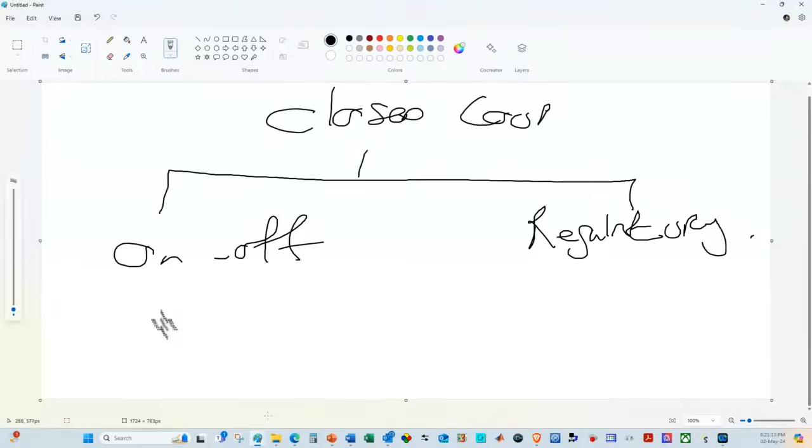I've got a tank, and my electrical colleagues put these little floater balls into the tank itself, and I'm going to have a pump at the bottom. What's going to happen is when I get to the high level over there, my pump is going to start to run. And when I get to the low level, my pump is going to stop running. So I can run it, and I can stop it.

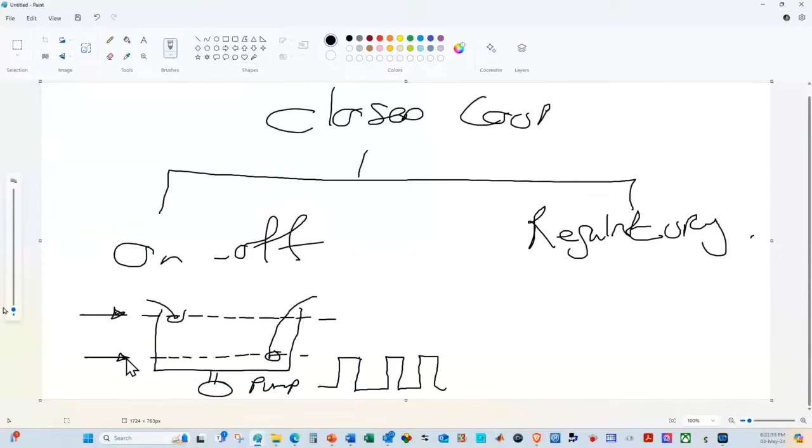My level is actually changing between that point, which might be at 90%, and that point, which might be down at 20%. My level is going to go from 90% to 20%, back to 90%. In other words, as the level gets high, I'm going to start the pump, and the level is going to drop down until I get to that 20%. Then the pump's going to stop and the level is going to start to rise up.

And then when I run the pump, the level is going to drop down, then rise up, then drop down again. These are two digital signals that I'm going to feed into my PLC. Kabu, does that explain it? So my PLC can work with on-off signals.

Now just to get back to my slides, does that not tie in with that form of control on the left-hand side? My level is going to vary between 90% and 20%. It's not a bad form of control, but it's going to give me quite a large variation.

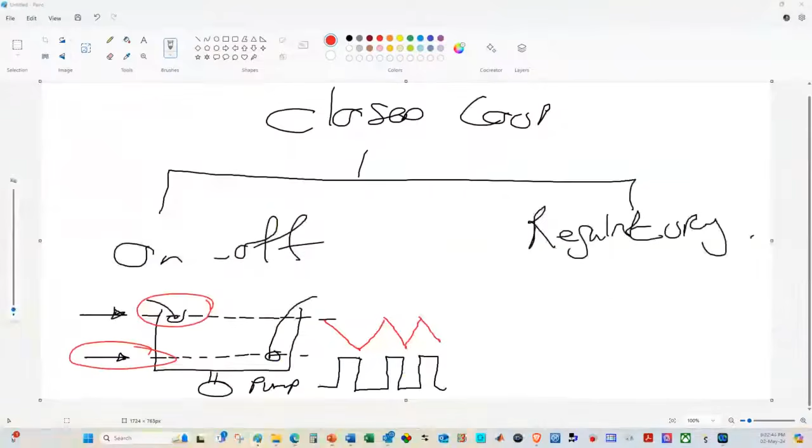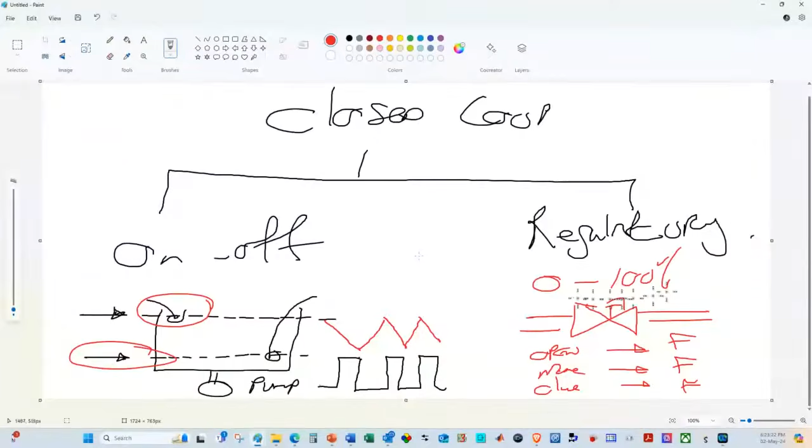Now if that's not good enough for you, then maybe you're going to go and have a look at the regulatory control. Regulatory control is when I control an output anywhere between 0 and 100%. Maybe I've got a control valve on my line, and that valve is going to be opened or closed. If I open it up a fraction, my flow is going to increase. If I open it up some more, my flow is going to increase a lot more. If I start to close it, my flow is going to start to decrease. That becomes the regulatory control. I can take it anywhere between 0 and 100%. And this starts to tie in with something I'll be speaking about very shortly.

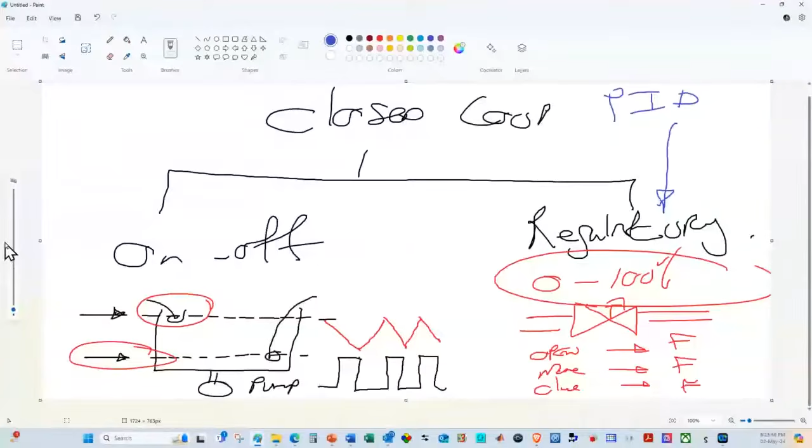And that is that we are going to put a controller in, and that controller is going to be known as a PID controller: proportional, integral, and derivative. That's the way we're going to start to control our process. God knows, I have not forgotten about your question. I'm working towards it. Let's go and get a brand new page.

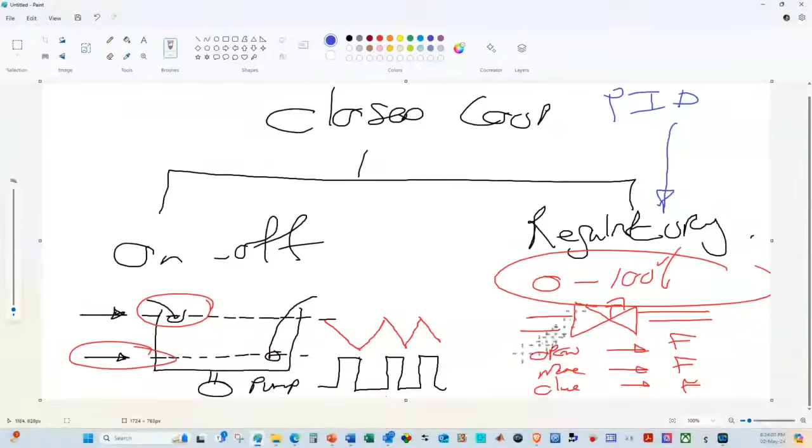Folks, I hate death by PowerPoint. I hate to put up slides where you have to read the slides and look at this and look at that. This is the way I present. I prefer to be very active, drawing my own pictures, if you don't mind. Right, let's get back to a brand new picture.

So what happens with my process, and why do we start to have a look at if there are going to be any losses? My process is sitting right over there; that's going to be my plant. Maybe I am controlling a level, a temperature, a pressure, or a flow. That is my process. I'm going to have some instrument put in place, and that instrument is going to measure my signal for me. Now that instrument will send an electrical signal, known as my process variable, and that could be something such as a 4 to 20 milliamp signal.

And this is going to come to my controller. I'm going to put in an arrow over there. Now have a look at what I'm going to do. My controller is going to, in this case, be negative feedback, a closed loop control. My controller is going to have a target value known as the set point, and it will compare the process variable to the set point. If there's a difference, it's going to calculate it as the error.

The error is the process variable minus the set point for a direct acting controller, or the error is set point minus the process variable for the other control that we are going to have. So it's going to come in that respect.

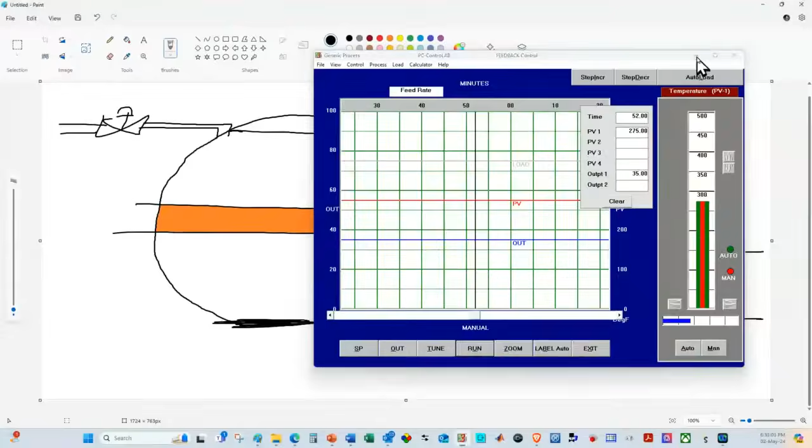Okay, thank you very much for those questions. I'm just going to keep this out of the way. I want to get back to that very, very shortly.

Now, when I start to look at a controller like this, then I'm starting to get automatic control, and then I can start to do this type of control where I am a lot closer to set point with my regulatory control, or I might put in advanced control, and then I'm going to be a lot closer to the set point.

I put in a set point of 75%, and it goes up to 76 and down to 74. I'm going to have very, very tight control. That's going to be a more important type of control. So yes, that's what it's going to boil down to.

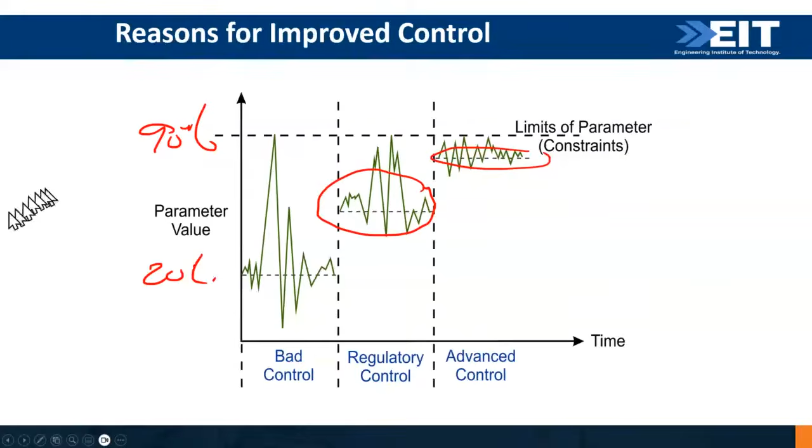The question from Timbu says, is SCADA an automatic or a manual control? Let me put that into perspective, and then we can take it from there.

When we talk about a SCADA system, my operators sit in a control room in front of a computer screen. That computer screen is often known as an operator workstation, or it's known as a human machine interface. That is the eyes and ears of my operator into the plant.

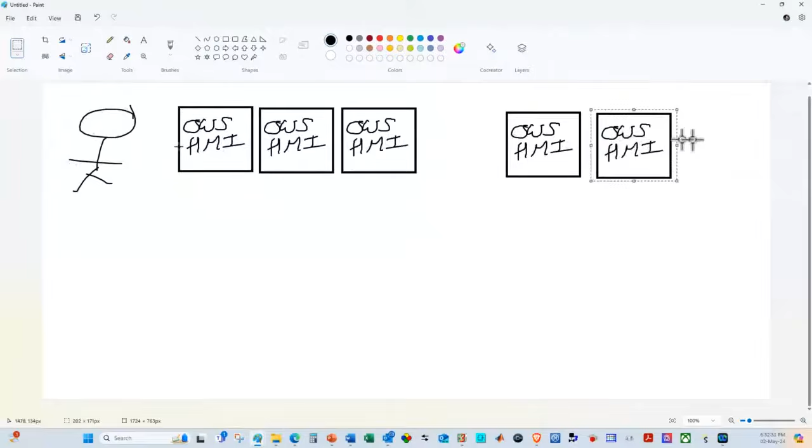Now the operators will have numerous screens. There's a second one in the control room, and a third one in the control room. All of these computers are linked to each other by means of a network cable, and that network cable is then connected to a very important computer system known as my master station, which could be one of the other computers, but I'm going to put this down as my master station. That computer, the master station, is in turn connected up to a network.

That network goes to my PLCs out in the field. My RTUs is the fancy word. There can be a PLC, and there can be a PLC, programmable logic controller, and there can be another PLC, programmable logic controller.

Now, this is actually known as my SCADA system. The total system is known as a SCADA system, or a distributed control system, DCS. The difference between DCS and SCADA actually lies here, because in the case of SCADA, I can send the information over long distances: 1 kilometer, 10 kilometers, 100 kilometers, 1,000 kilometers, 10,000 kilometers.

Absolutely correct, SCADA stands for Supervisory Control and Data Acquisition. Now, to get to your question, Chimbu, the operator sitting here can, for example, have a level control sitting on that PLC. If the operator puts that control into manual, then they have to change the input, the output, from 0 to 100%. Then it's manual control.

Right, I'm going to get back to my slides. We've now spoken about the different types of control that we can have. This is my plant. Anything that affects my plant is going to be a disturbance.

How about if you and I are going to try and control the level inside the tank, but I have pipes coming in which I'm not monitoring, and they can cause the tank to overflow? Any disturbance that is not measured is what we refer to as a disturbance that we have to work with.

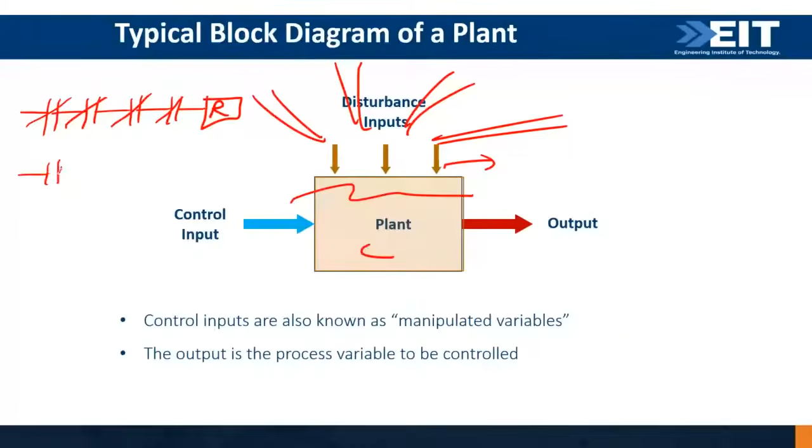Samuel asks, what are interlocks in control? If I was to have a start-stop process, if my system has no vibrations, and if it is not over in temperature, and if this switch happens to be in the right position, and if I do happen to have the right air coming in, I'm going to bring in my interlock relay. Once the interlock relay is okay, then I can operate the rest of my circuit. So an interlock is just going to lock out certain sections of my plant for me.

Remember that we spoke about PID control, and I said to you that the controller is going to have a look at the error.

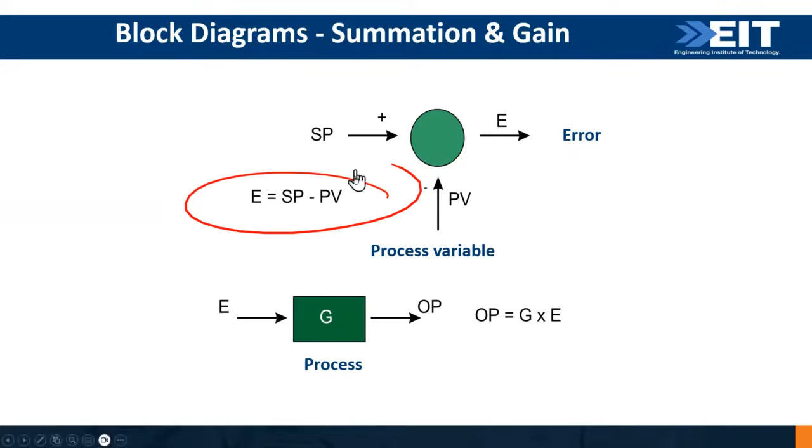The error is the difference between the set point and the process variable, and that's what it's going to use to control my process. I can have different types of processes.

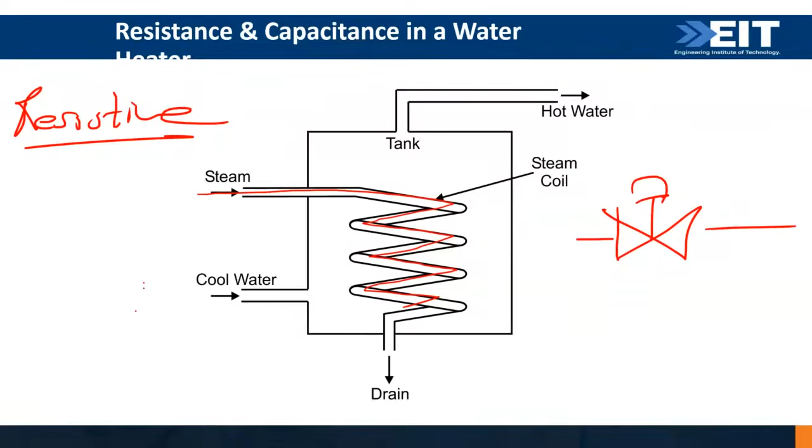Often we're going to have a process which is resistive in nature. For example, trying to put steam through a boiler with a very thin pipe, and that flow has to make its way through the pipe against the resistance. Or I put a control valve in the line, and that provides a certain amount of resistance. That's the resistive part of a process.

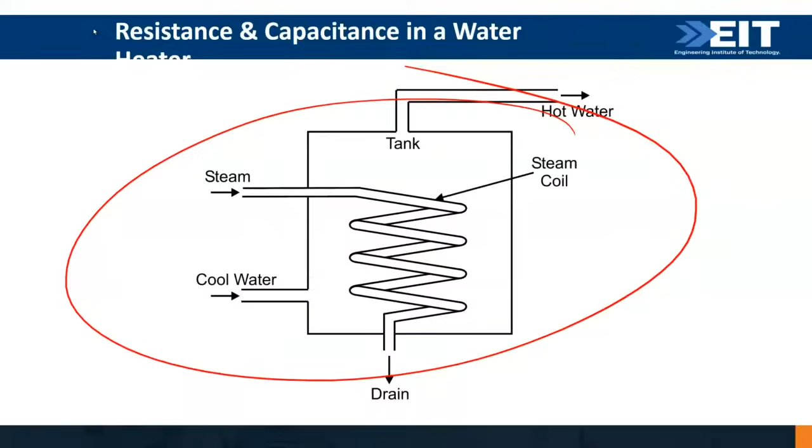We can also have the capacitive part of a process. A small tank is going to fill up a lot quicker than a big tank. So that becomes the capacitive aspect that fits into the process.

Often you'll hear people talk about a first order process or a second order process. It's purely academic. In the case of a first order process, when I open up the valve, my process responds immediately. That's a first order process. However, if this tank is connected to another tank and I'm trying to control the level in that tank, and this tank has to first be controlled to get that tank controlled, then my process tends to respond in a more S-shaped manner, and that becomes a third order or a second order process.

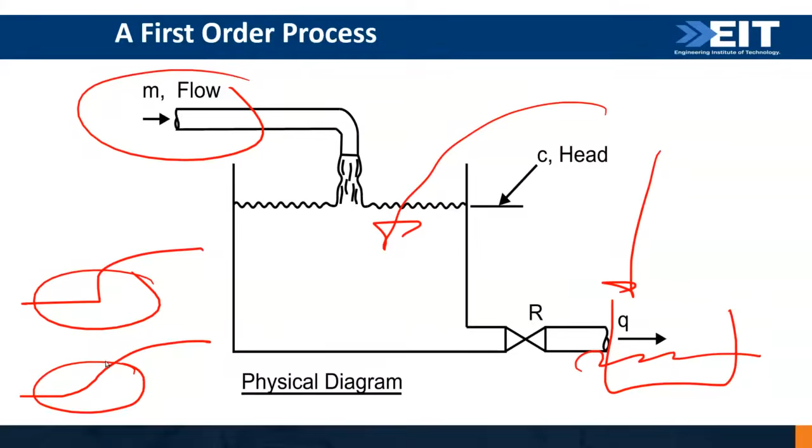Erasmus asks, is it advisable to use power relays in place of interlocks? It's entirely up to you, but please remember, if you are going to have a safety system such as an emergency stop, then you have to have it hardwired into your system. You can't put it into a normal PLC. You can put it into a safety PLC, but not a normal PLC. It must be hardwired into your emergency system.

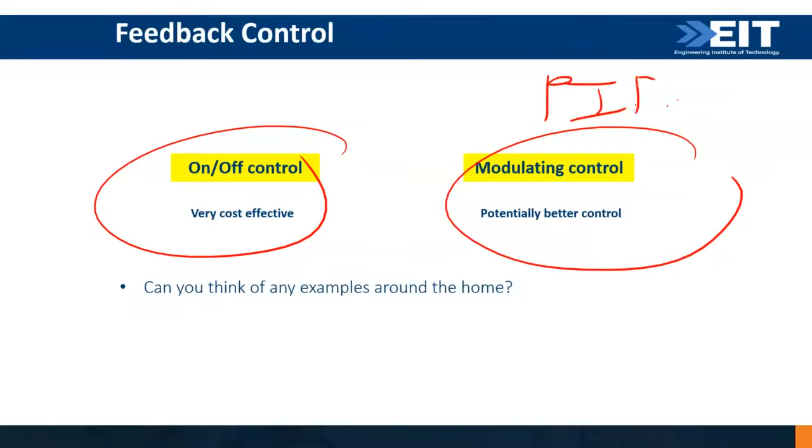Right, there's my first order process that we've just spoken about. Now, I said to you that feedback control could be on-off control or modulating control. In the case of modulating control, we're going to be putting in a PID controller.

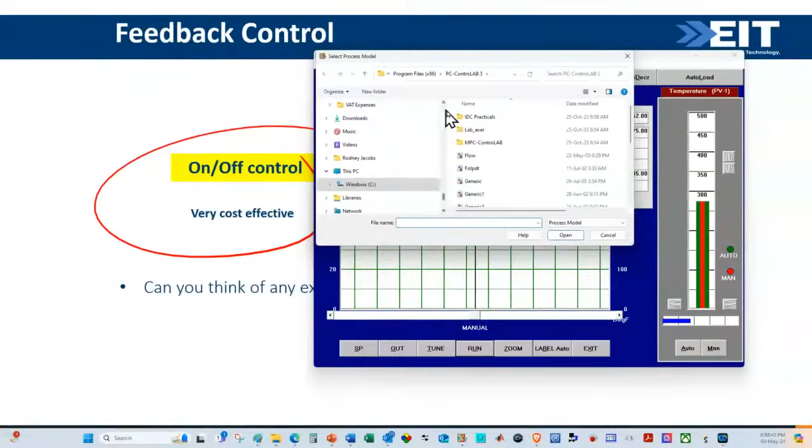Maybe I should go and demonstrate a PID controller for you. I'm going to say process, select a model, and in this case I'm going to use the generic model. We're going to open that up. These are all on our remote labs. If you do an EIT course, you can actually get access to these pieces of software that we have. I'm just going to make sure that I'm viewing this in minutes, and make sure that I'm viewing it in percent.

Okay, now this gets to the three types of control that we can put in. I'm quickly going to press the control button and look at the control options, and let's purely do a proportional control only. Proportional control. Right, I'll go to the tuning parameters and set that value to 0, and set a gain of 1.

Now, what the controller is going to do right now, if I put it into automatic, remember the question you asked earlier about automatic or manual, I put the controller into automatic, and look what's happened. My set point is sitting at 50%, but the process variable has run off somewhere. That's purely because this is a mathematical calculation. Whenever I do P control only, I'm going to have an offset. My process variable does not get to the set point.

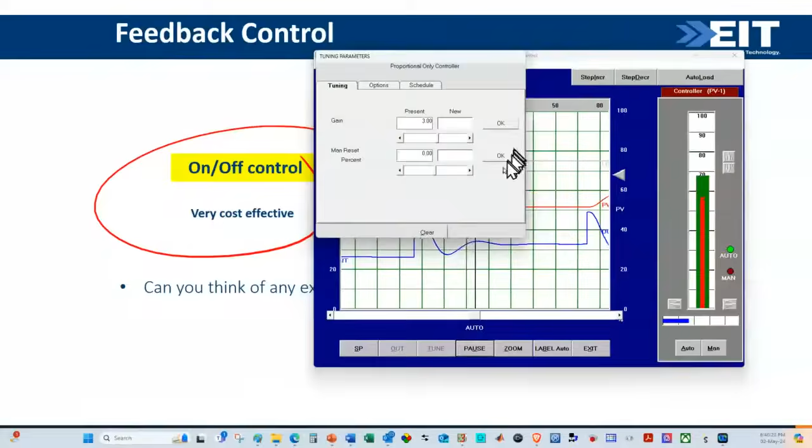I can go and change the set point. My process variable will get closer, but I'll always have an offset. I can put in a larger gain. Let's put in a gain of 2. What will happen is that my final control element works harder. The offset gets smaller, but the offset does not disappear. I can put in an even larger gain, and the offset will get smaller, but it's not going to disappear.

Now let's put this in perspective. If I talk about the P type of control, the advantage and the disadvantage is that this is my main form of control. When you drive your vehicle and you push the brake pedal slightly, the car starts to slow down.

If I push the brake pedal down very hard, the car screeches to a stop. It's based on the proportional signal that I've set. Most controllers are going to use P control. Disadvantage: it's always going to give me an offset.

You saw that, it did not get to the set point. Now this is where we bring in the next form of control, which is my I control. I'm going to go back to this controller, close it, and start it up again from fresh, and show you how we do the I part of PID control. There is my controller back on the screen, and I'm going to use exactly the same process, my generic process right over there.

Let's go and turn that to view the percentage of the display range. Now I need to tell it to do I control only. Let's go and do integral control only, that's going to be it. Now let's give it an integral value, maybe I'll put in an integral value of about 50. Okay, now look at what's going to happen.

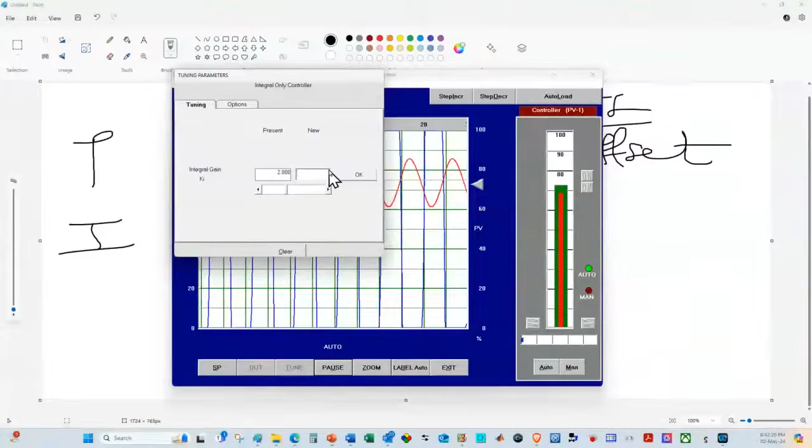100 divided by 50, I should have put in a value of 2. I didn't realize it had that setting over there. Let's put in a value of 2 and see how that works for us. That should be a lot better.

I'm just going to stop this quickly, stop the controller and open it up. I didn't realize it was looking at the wrong setting. Let's put that value in quickly. Where's it gone to? It's gone to this page over here. Let's bring it back for us to have a look at.

In this instance, I'm going to say control, and my control option is going to be integral only. Let's put that into the controller itself. I'm then going to put the controller - it doesn't make a difference if it's auto or manual, it doesn't make a difference at all. I'm going to put in a tuning parameter of 0.04. Okay, let's put that in.

Now, if the controller is in automatic and I change the set point, my output keeps changing until I get to the set point. So that's the purpose of integral action: it's there to get rid of the offset. Look at that, I've now managed to get to the set point. I can make it faster if I want to.

Let's put in a value maybe of 0.16 to make it faster. Now when I change the set point, it's going to move a lot quicker, but the faster it moves, the more unstable the process becomes. Imagine this is my level that I'm trying to control - you see how the level has gotten a little bit unstable. But it's going to sort itself out anyway.

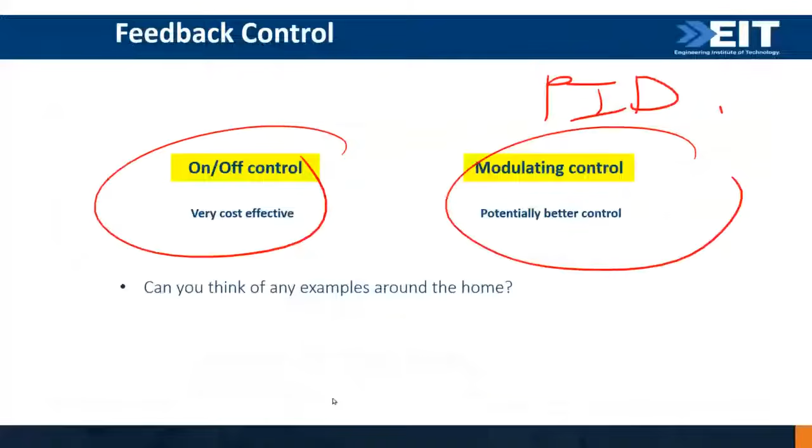Okay, that is it. So when we do regulatory control, I'm going to have a controller, and that controller is going to have three settings: proportional control, integral control, and derivative control. This is what we are going to work with.

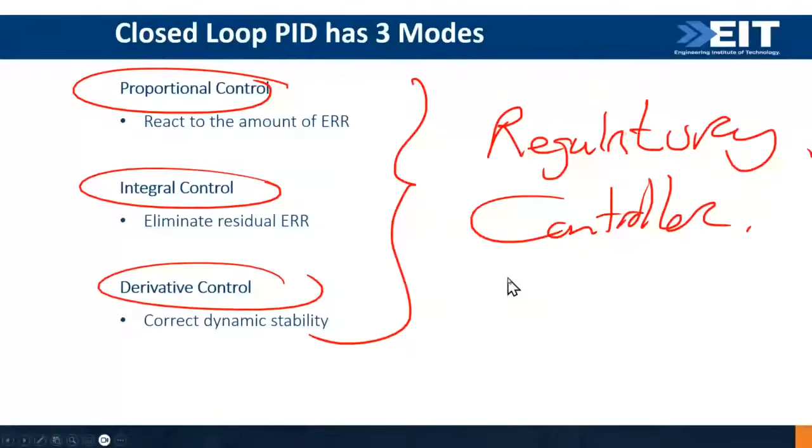Now, I can use proportional control on its own. I can use integral control on its own. I can use a combination of proportional and integral. I can use proportional and derivative, and I can use full PID control. I just cannot use derivative control on its own.

In this case, PI is going to be used with very fast processes, maybe something such as a flow control. In this case, PID is going to be used in very slow processes, maybe something such as a temperature or a pH or a conductivity control. That's going to be the difference we can encounter. You look at your process and then decide what you are going to put in place.

Some of you might even hear people talk in terms of cascade control. In the case of cascade control, I've usually got one controller built into another. How about if I have a boiler sitting over there, and I have cold water coming into the boiler, and I would like to have hot water coming out of the boiler. I can bring in steam.

That steam is going to go through a control valve into my boiler, and I can use that to control the flow. I've got a temperature transmitter connected up to a temperature indicator and controller with a set point, and that operates my steam valve over there. Now, sometimes that may not be good enough. Sometimes I might have a disturbance on my process, such as the pressure going up and down.

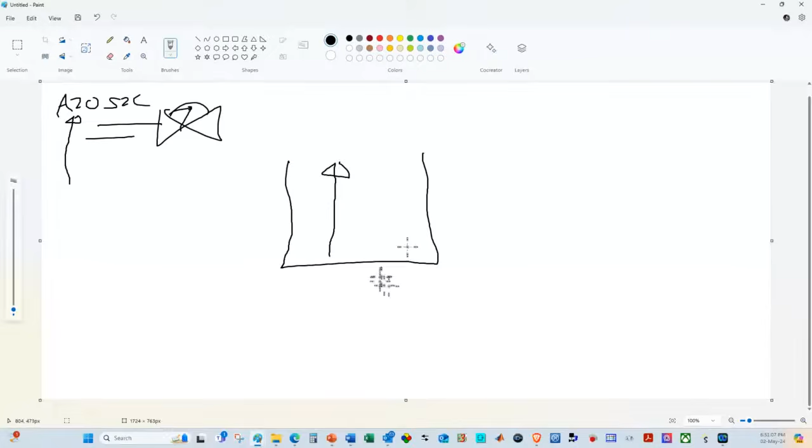What if I was to have a tank, and I have a valve sitting over there, and this valve is going to be air to open, spring to close. If I give this valve any air, it's going to open up, and the level inside the tank is going to rise. What if I was to have the same valve put in over there? In this case, it's also going to be air to open, spring to close. If I give it air, it's going to open up, and now my level is going to drop in the tank. So the controller that I put in there must be different to the controller that I put in over here. The one needs to be direct, and the other one needs to be reverse control for us to get that to work.

What are the basic final control elements in a refinery plant? Shadrach, how about something such as a control valve with an actuator connected to it? Or how about something such as a variable speed drive connected to my pump? Those are some of the final control elements. A final control element is whatever I manipulate to ensure that the process works exactly as it needs to work for us.

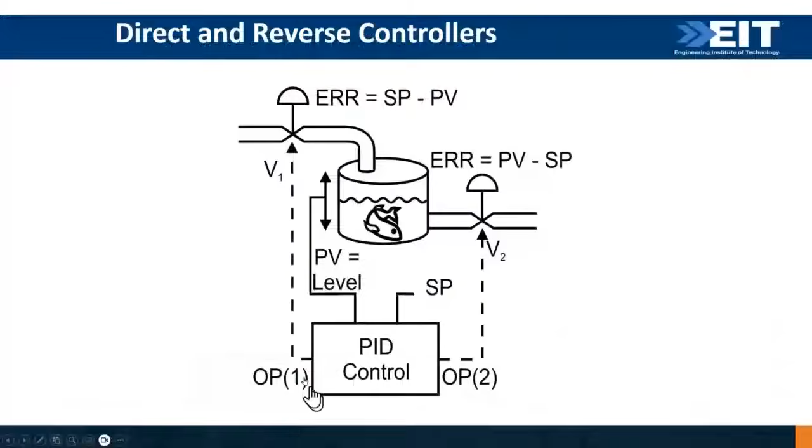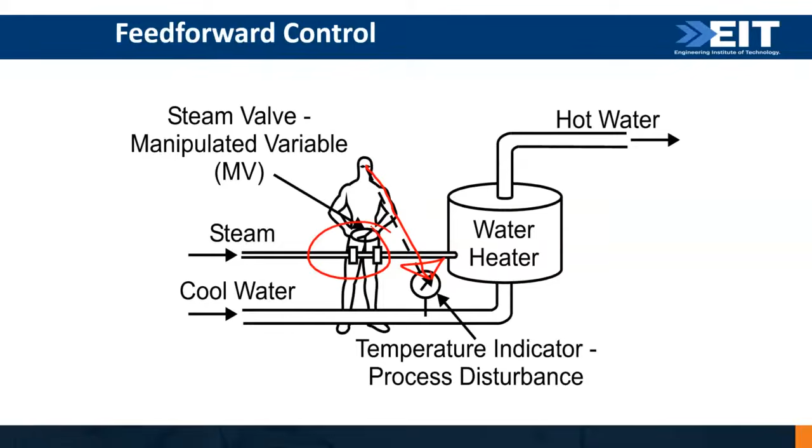Right, feed forward control. We spoke about that one earlier, but we've already got this covered. Feed forward control is when I look at one thing to go and control something else. That's going to be a feed forward control that we can encounter.

Now, during our training, we are going to show you how to calculate the PID values of your controller. That is referred to as loop tuning. Wow, look at our numbers, we've jumped up to 87 at this point in time. Loop tuning is when I go and adjust the proportional value, also known as the gain, or I go and adjust the integral value, also known as the reset, or I go and adjust the derivative, also known as the rate.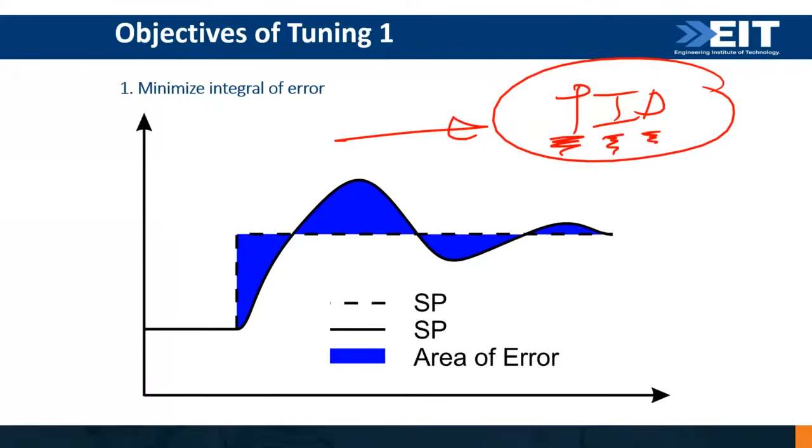There are so many different controllers that we can use, and so many different techniques for loop tuning. I don't have time to show you a formalized session because I'm getting close to the end of my section. But what I'm going to do is show you how we can tune a process using trial and error.

I'm going to take this controller of mine, let's just put this into a percentage. And I'm going to put in a low gain, maybe a gain of 0.5. Is it going to accept that? Yes. My minutes per repeat have been switched off, and my derivative has been switched off.

Now, if the controller is in automatic and I give it a step change, you can see that the process is going to respond, and it's pretty sluggish. So what I can do is increase the gain. Let's try a gain of 1 and look at the dynamic response. Let's see what my process variable is going to do. My process variable has responded, but I can probably have it a little faster than that.

I'm going to put in a gain of 1.5. Okay, that's going to be it. Now, if I go and change it, you can see that the process is going to have a certain amount of behavior. I haven't used a calculator, nothing like that at all, and it's doing what it has to do.

Next, I can think in terms of putting in the integral value. Let me see what I'm working with here - I'm working with minutes per repeat. Hopefully if I put in a value of about 10, let's see what happens. Now when I activate the process, the gain kicks in straight away, and then my process variable is going to start to take away the offset.

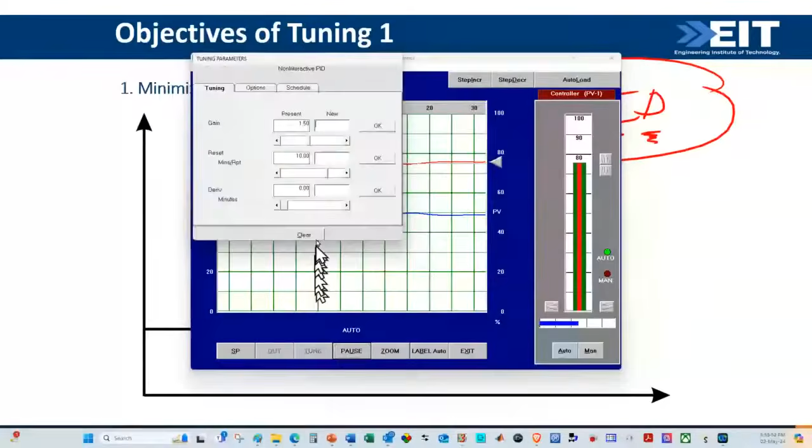Derivative action is to make it very, very smart. I can, for example, put in a derivative value. What's going to happen now is that it's going to give me a much smoother but more effective process. That is a very quick way of tuning a PID controller.

There are more formal methods such as Ziegler-Nichols, which I'm going to teach you if you do come and sign up for our workshops. So that is what loop tuning is going to be all about.

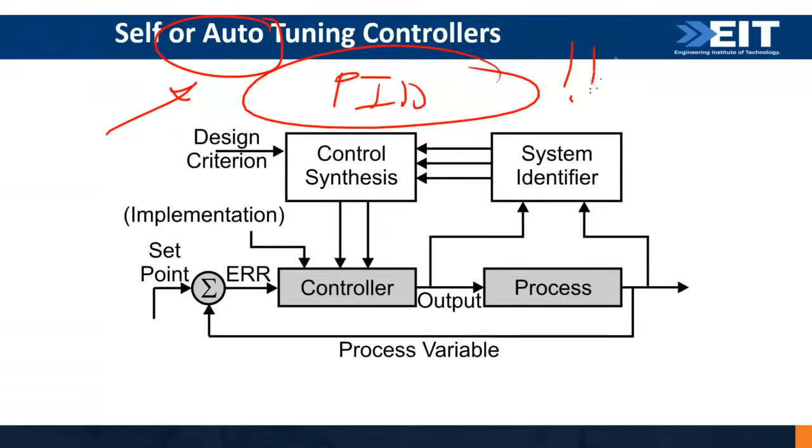Lastly, please remember that we do have auto-tuning controllers. These controllers, when you push a button, are automatically going to go and set their PID values. I kid you not, they do that automatically. You and I don't have to go and do that at all.